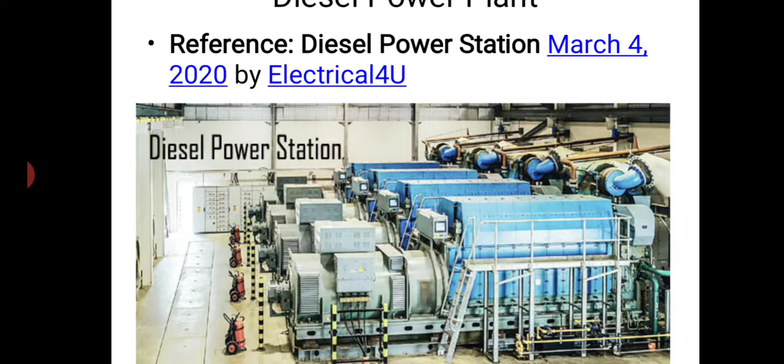So this is one picture of a diesel power station I got from the net. It has got 4 plants actually. You can see 4 plants, blue color, and this light green color is a generator, alternator which generates the current. Okay, and on the top you can see there is a turbo supercharger also. So you can see the 4 plants here. Then fire safety systems are there, and then electrical units are there.

These are, as I told, multi-cylinder engines, mostly in V type configuration. Maybe 10 cylinder, 12 cylinder, 14 cylinder, 16 cylinder. In this configuration, you will get this engine. So they are very big engines, maybe around 10,000 horsepower and above, which are used as a power station. We have seen small generators, but we have not seen a diesel power plant. So I thought I'll share the photograph.

And for maintenance also you have got a stand here so that you can open and see the engine cylinder heads and all. That kind of arrangement is provided because they are very tall in nature. Normal engines we stand and we can attend, but these engines are almost 10 feet and all. So you have one more platform there so that you can climb up and inspect and do some repairs if required.

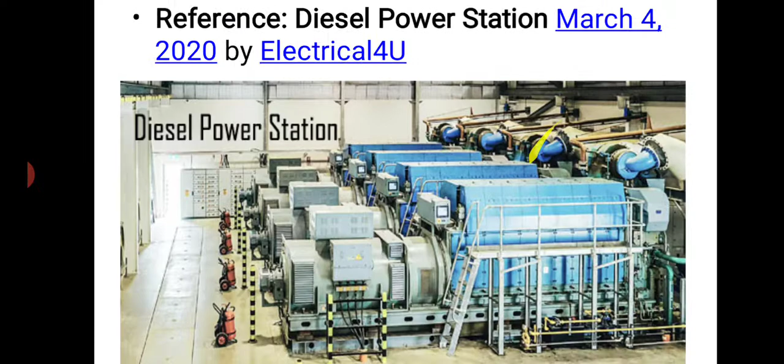So for generating electrical power, it is necessary to rotate the rotor of an alternator by means of a prime mover. The prime mover can be driven by different methods, and using a diesel engine as a prime mover is one of the popular methods of generating power, especially in the Gulf where oil is available freely. Very economical cost, so it is used. So when a diesel engine is used as a prime mover to rotate the alternator and generate current, it is known as a diesel power station.

The mechanical power required for driving the alternator comes from combustion of diesel. As diesel costs high, this type of power station is not suitable for producing power on a large scale in our country. Our country is importing crude oil, diesel is around 80 rupees a liter, and in 1 liter we produce almost 4 units of power, or maximum 5. So the cost of fuel itself is around 20 rupees per unit. So it is not economical in India, but where it is very cheap, in the Middle East and all, they are using this diesel power station.

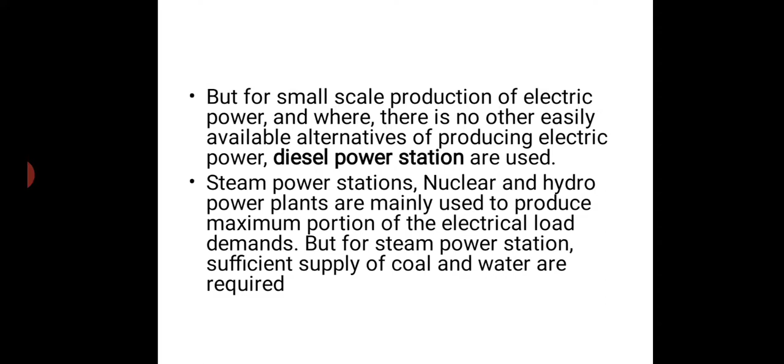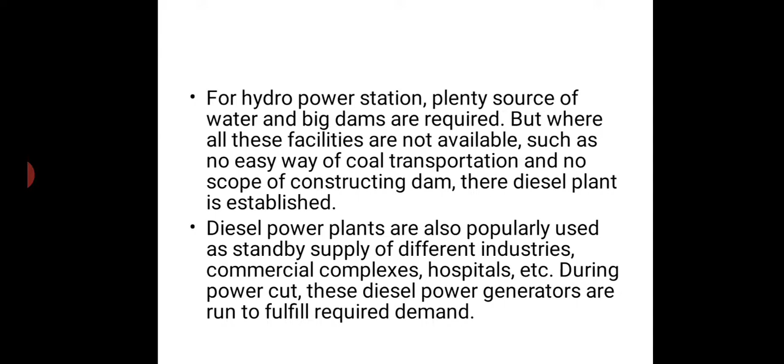But for small scale production of electric power, and where there are no other easily available alternatives for producing electric power, diesel power stations are used. Like I said, small generators are used in hospitals, hotels, movie theaters, colleges and all. Diesel power plants are also popularly used as a standby supply for different industries, commercial complexes, hospitals, etc. During power cuts, these diesel power generators are run to fulfill the required electricity demand.

So we will see the advantages of diesel power stations. They are simple from a design point of view. They require very little space. They can also be designed for portable use. Nowadays you have seen them for marriages and some functions, portable. You can carry it in a truck also. Then it has got a quick starting facility. A small diesel generator can be started within a few seconds. Then it can be stopped easily also.

These machines can be easily started and stopped as and when required, and there are no standby losses in the system. Cooling is easy and requires a small quantity of water in this type of power station. For cooling they also have radiators, and all are small units. So cooling is comparatively easy for smaller plants.

Initial cost is less than other types of power station. Other types of power station like coal, even wind, cost almost 5 crores per megawatt. But this will be cheaper than that. Thermal efficiency of the diesel engine is quite higher than coal. See, liquid fuels burn better than solid fuels, and gaseous fuels burn even better than liquid fuels. So the efficiency of diesel is higher than that of coal.

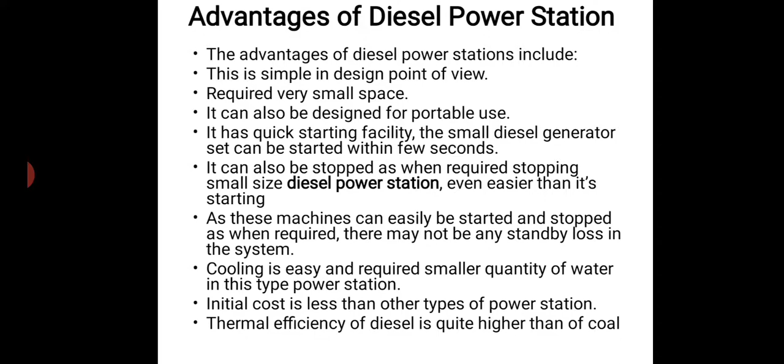Now we will also see the disadvantages vis-a-vis steam power plant. The cost of diesel is very high compared to coal. Coal is very cheap, and the cost of fuel is very low in terms of coal, whereas diesel is very expensive. This is the main reason why diesel power plants are not getting popularity over other means of generating power. In other words, the running cost of the power plant is higher compared to steam and hydro power plants.

Hydro power plant running cost is very low, less than even a rupee per unit, whereas steam power plant will be around 2 to 3 rupees a unit, whereas diesel will be around 15 to 20 rupees per unit. And these small diesel power plants produce only small capacity, say in kilowatts or 5 megawatt, 10 megawatt, not more than that. Whereas steam power plants, as I discussed, 500 megawatts. The latest trend is almost 500 megawatt units.

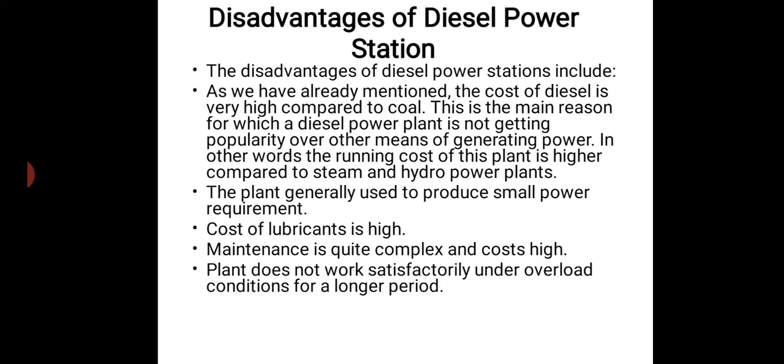And the cost of lubricants is high. Lube oil is around 250 rupees a liter, which you put in engines, our bike engines also. Maintenance cost is very high and maintenance is complex. And they don't work for overload conditions. Whatever the rated conditions are, up to 80%, 90% loading is okay.

So we have seen the different components of a diesel power plant, like the fuel supply system. There is a storage tank, strainers, fuel transfer pump, and day tank. Then strainer. During transfer from the main tank to the smaller day tank, the oil passes through a strainer to remove solid impurities. From day tank to main tank, there is another pipe connection, the overflow pipe. I had told you, any overflow in any diesel engine goes back to the tanks only.

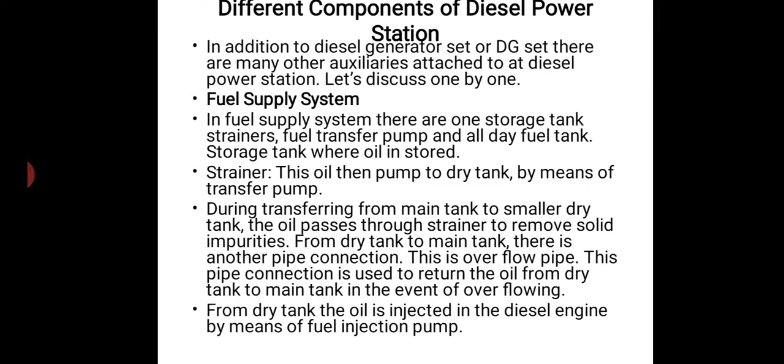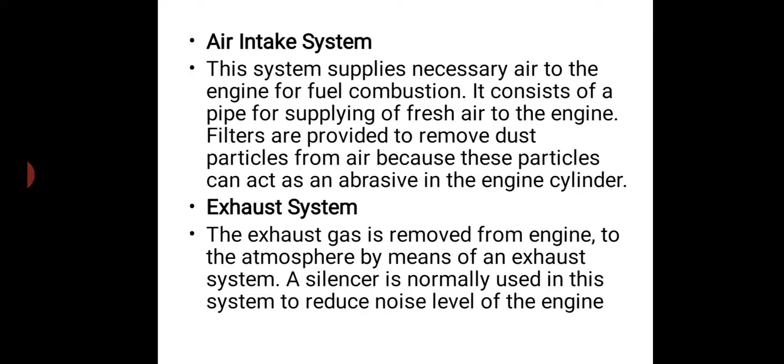Then the air intake system supplies necessary air to the engine for fuel combustion. It will have a filter to remove the dust, since dust particles can act as an abrasive in the engine cylinder. And exhaust also is there. The silencer is used to reduce the noise level.

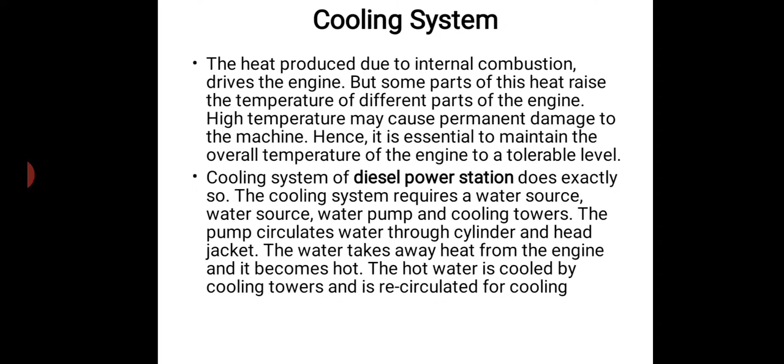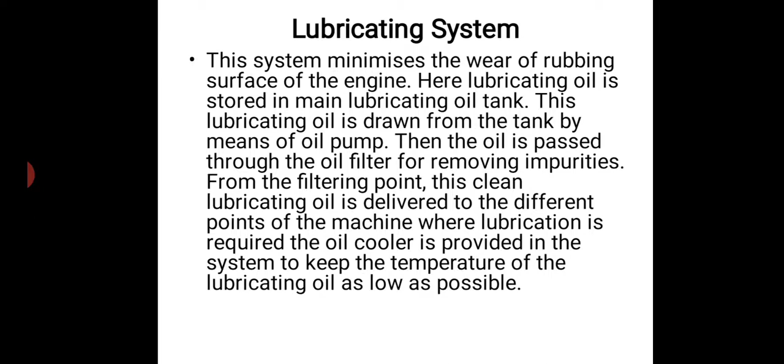Cooling system, I think we have seen. I have a separate video on cooling systems, different types of cooling systems, which have cooling towers and all. Lubricating system also, 3 types of lubrication system, like dry sump lubrication, splash lubrication, and pressure feed lubrication. I have a separate video on that.

And lastly, the engine starting system, I had discussed this. For starting a diesel engine, initial rotation of the engine shaft is required. For a small DG set, initial rotation is provided by handles, like in your water pumps in villages, they have manual handles to rotate the crankshaft. But in case of big engines that is not possible, and you have an air compressor with around 20 air bottles, meaning air reservoirs; around 20-25 bar pressure air is applied on the piston, and then the crankshaft is rotated for cranking the engine.

So this is about the diesel engine power plant. You can also start a small engine, which can then be coupled to the big engine for starting. So there are 2-3 methods. One is the air compressor, very popular. Then using a small engine for cranking.